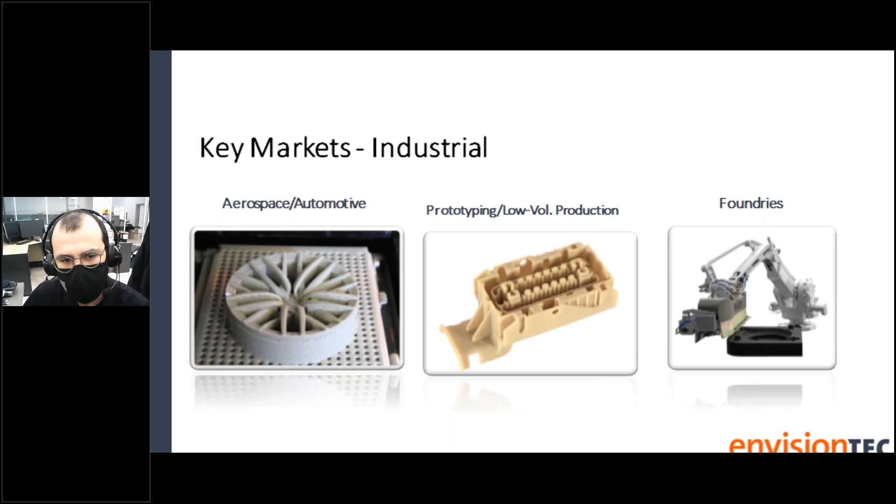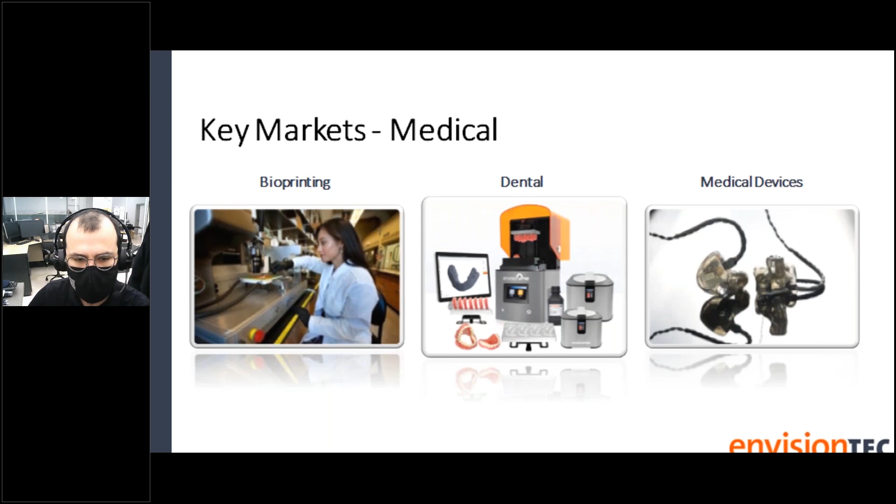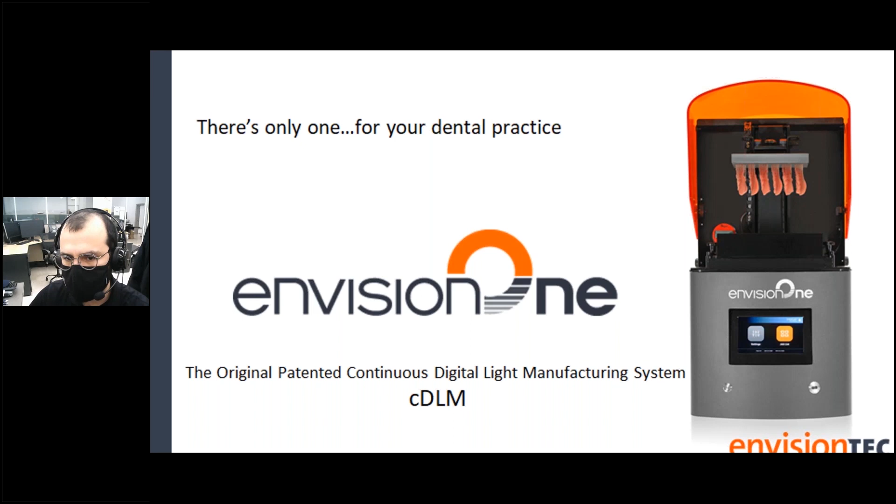Now you may ask, why is that so special? Well, when we introduce oxygen into our 3D printing, this allows us the fastest, highest level of accuracy and resolution, and zero separation forces. What that means is when the oxygen is introduced to our printing, we eliminate the typical

layering and visible striations that you may commonly see in a lot of dental parts. So this allows us to offer the highest accuracy desktop printer, but it also allows us to print large parts flat. We are well over 4 times faster than the standard DLP printer and over 10 times faster than the typical desktop SLA printer.

Now, speed in large parts is fine, but what's even better is to be able to maintain a highly accurate part that offers better mechanical performance. And what I mean by that is when our parts come off of the printer, we have maintained the same level of strength in the X, Y, and Z axis. This is known as isotropic properties. Very important, the EnvisionOne is the only desktop printer that can offer that.

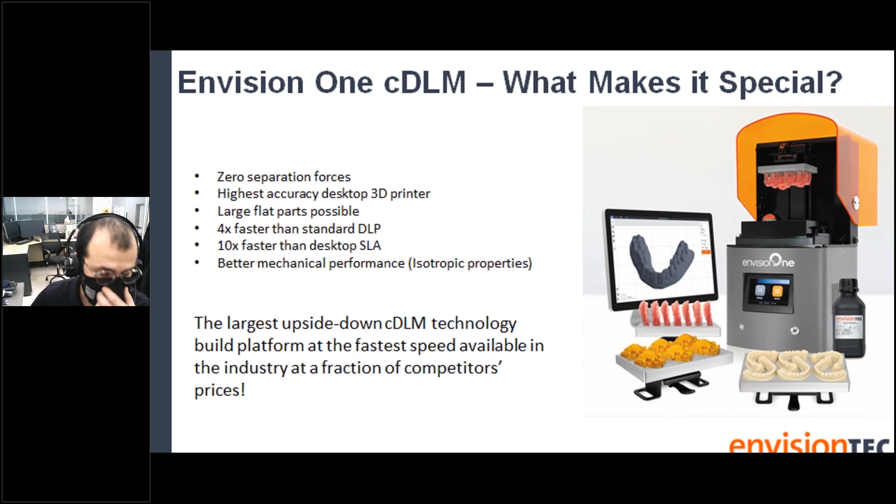And again, we offer the largest build platform at the fastest speed, so it'll really handle a lot of daily throughput.

So when we talk about fast, just to give you an idea, and this slide is a little bit dated but it'll give you an idea, the EnvisionOne prints at an average of 50 millimeters per hour. As I said, this slide's a little bit dated. We now have some new materials, some new software upgrades that are actually allowing us to print some model materials in excess of 100 millimeters per hour.

Again, this depends on the type of material and the layer thickness that you're printing, but you'll see versus the average DLP at 12 millimeters per hour or the average SLA printer at 5 millimeters per hour, this really is a much faster based process that will allow for a lot more daily throughput.

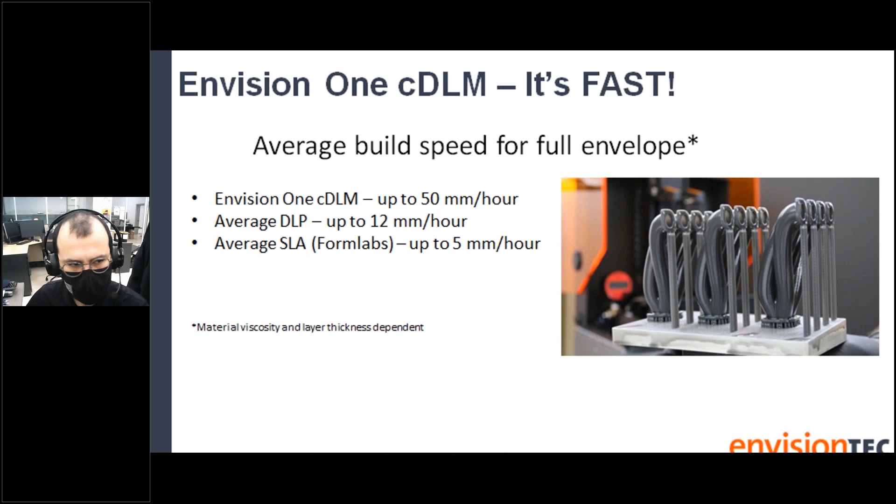So here, Miguel is running a full build plate, and you'll see that we're completing these parts in about 24, 25 minutes, I think, Miguel? Yep. The EnvisionOne, again, we've now surpassed 1 millimeter per minute.

We have layer thickness options that go from 5 microns up to 150 microns, depending on the material. Just to give you an idea, this means printing a full tray of dental models at 50 microns resolution in 30 to 45 minutes. If you were to move that to say 100 microns, you now have the ability to print dental models in the 15 minutes or less space, depending on the material.

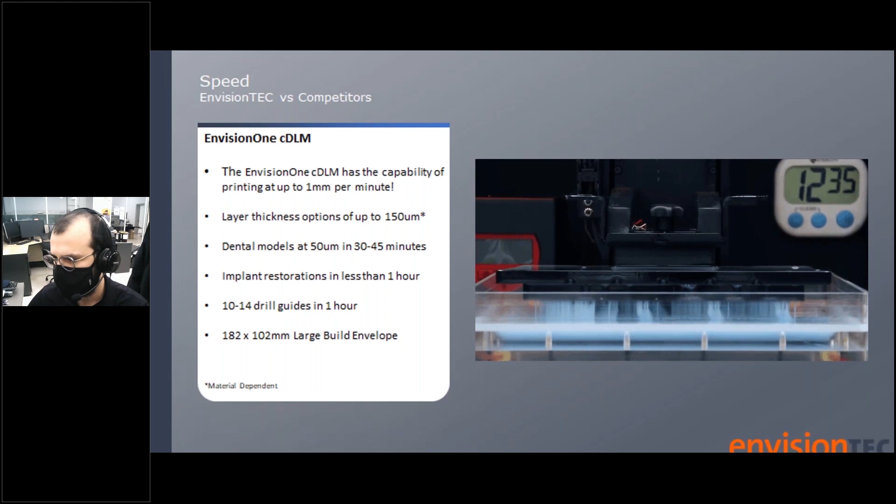A full tray of implant restorations in less than an hour. That also equates to give you a visual of 10 to 14 drill guides in 1 hour. And again, a large build platform, 182 by 102 millimeters, which is equivalent to like 7 by 4 inches.

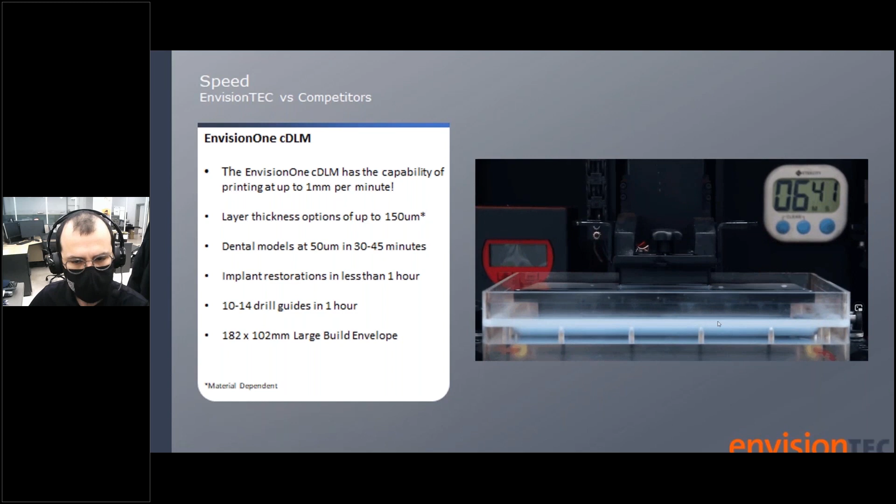So while hardware and equipment is good, materials is even more fun. We have the largest industry-leading portfolio of materials for 3D printing. In dental now, I think we've surpassed 24, 25 different resins.

Dentures for the base, denture teeth, a variety of models, including crown and bridge model material that allow for really beautiful quads with removable dies, indirect bonding trays, surgical guides, a large variety of models for thermal forming. And we actually have a new one coming out called the E-Aqua model.

And what is really unique about this for orthodontic models is, within the name Aqua model, we are able to water wash this model material after it comes off the printer as part of our post-processing, and eliminate having to wash the models in an alcohol bath. So instead of an alcohol bath, it's a fresh water bath. There'll be a lot more information coming on that.

We also have ortho models that no longer need a separator medium for your salt and pepper Hawley model techniques. Night guards, a variety of nice, clear, hard, or soft, gingival masks, partial denture frameworks including our new metal-free partial. EnvisionTEC is also one of the only companies that can produce castable wax-ups for crown and bridge work. A variety of bite splints, again both hard and soft, as well as custom impression trays.

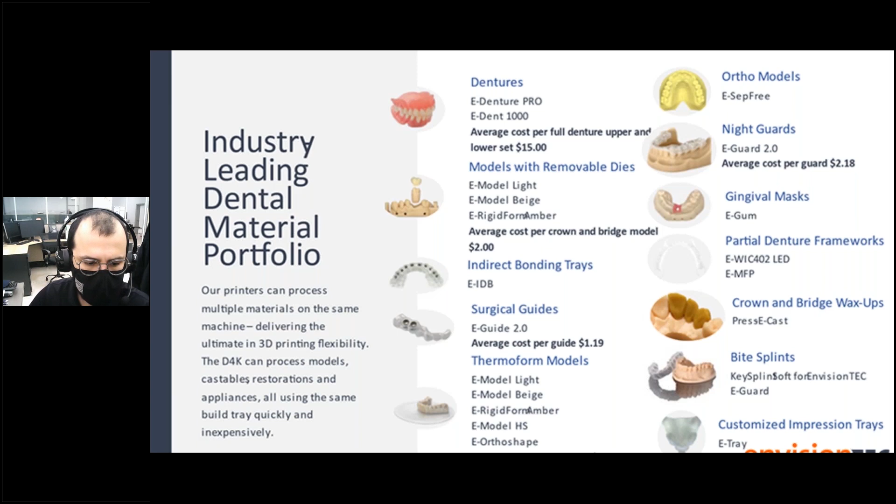Now, in addition to those materials that EnvisionTEC produces, we do actually work with other quality manufacturers as well, and this is to ensure high quality. So at EnvisionTEC, we have a new selectively open approach that allows us to partner with other material manufacturers that offer medical grade, end use, industrial materials that are going to meet our standards for usability and effectiveness with our printers. Now, just some of those are names like Keystone, Henkel Loctite, NextDent, DETAX, and Somos.

So we have a wide range of materials to go with our variety of printers as well.

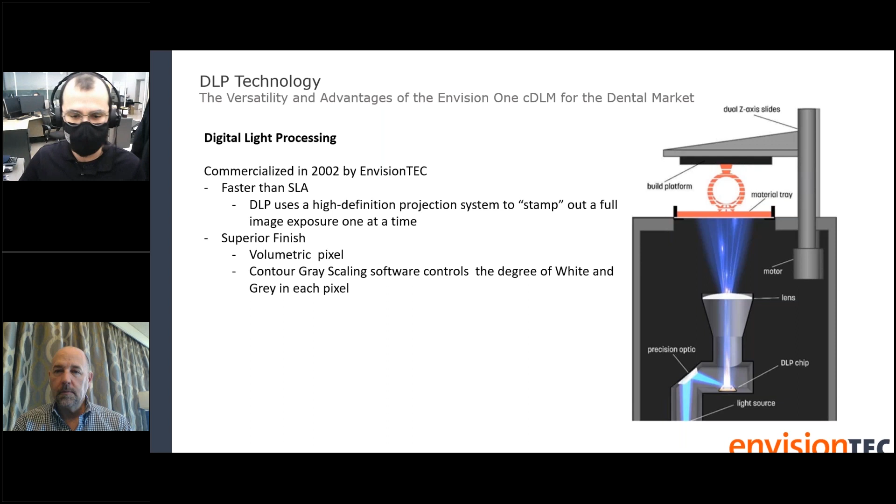Let's talk a little bit now about the 3D printers that we offer and what different technologies they use. After this, we're going to talk about CDLM, which is a twist to DLP.

Because we're talking about large platform printing, large build envelope, instead of taking that entire large build envelope and using a laser beam to trace the platform layer by layer, we have a laser head unit with a motor inside and lenses—a very complex piece of equipment.

The laser moves, and as it moves in the x-axis, it's plotting out points and drawing an entire line in the y direction. So it's moving in x, drawing in y, and we're able to scan the entire platform instead of tracing it with one small dot, which would take much longer. We're moving an entire laser head assembly, keeping it completely parallel to the material, which gives us better surface definition and lets us do it much faster.

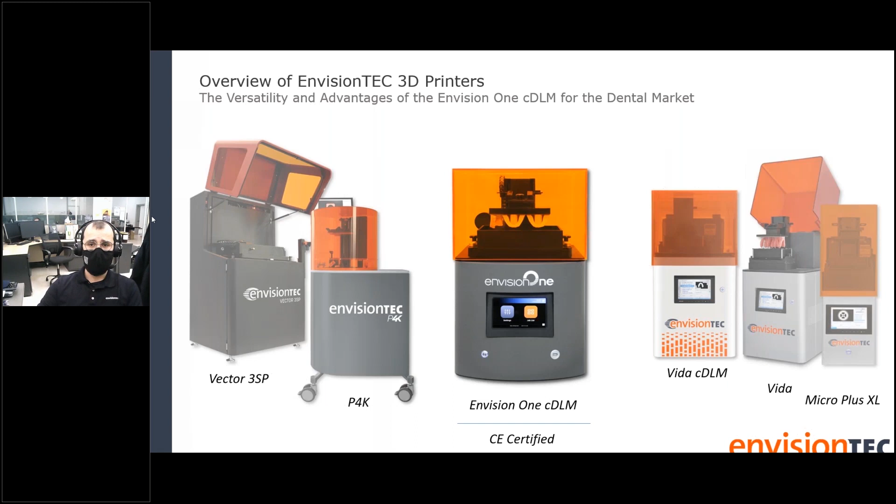Let's talk a little more about what CDLM is, because I want you to understand the technology behind this printer and what makes it so advanced. CDLM, or continuous digital light manufacturing, speeds up the DLP process by adding a thin layer of oxygen between the layer that's being cured and the material tray.

This layer of oxygen inhibits the resin from curing, which in turn adds many exciting properties. So the first advantage is speed.

We don't have to worry about separating from any type of film, and it also makes the pauses in between shorter. When you come down and you're ready for the next layer, you don't have to wait for material displacement because it happens so fast. This cuts off the time needed to build each layer, and overall the print time for an orthodontic model on the EnvisionOne is 30% less than other, let's say, pricey oxygen-based printers on the market.

So the second advantage of CDLM printing is accuracy. Parts printed on the EnvisionOne have isotropic properties and consistent part properties in all dimensions. This is especially important in the Z, because in prior 3D printing methods, while not all have the same quality, they share this issue.

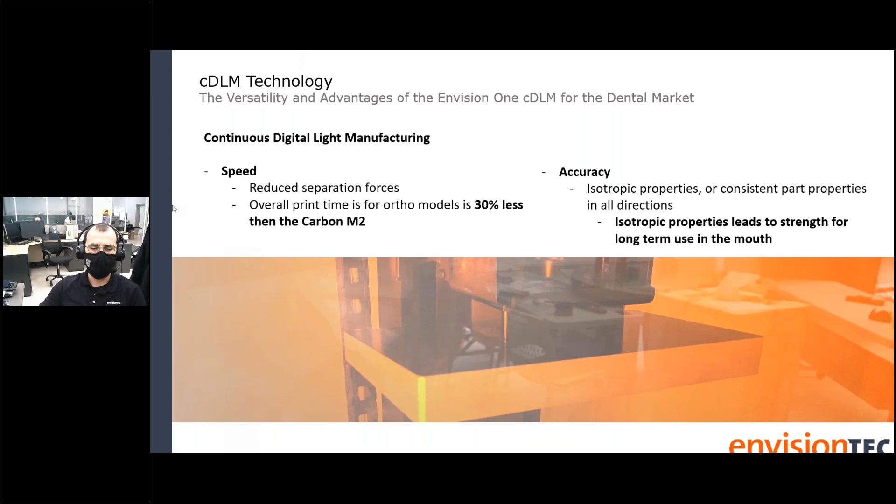Now, unfortunately, adding oxygen below a flexible film inevitably causes the film to tent or rise more in the center than in the outer edges. This means the film has a dome shape during the printing process, and the oxygen-rich liquid zone, the white zone, is also domed. This in turn means that parts are no longer 3D printed on a flat surface, even in the free space above this rich liquid zone.

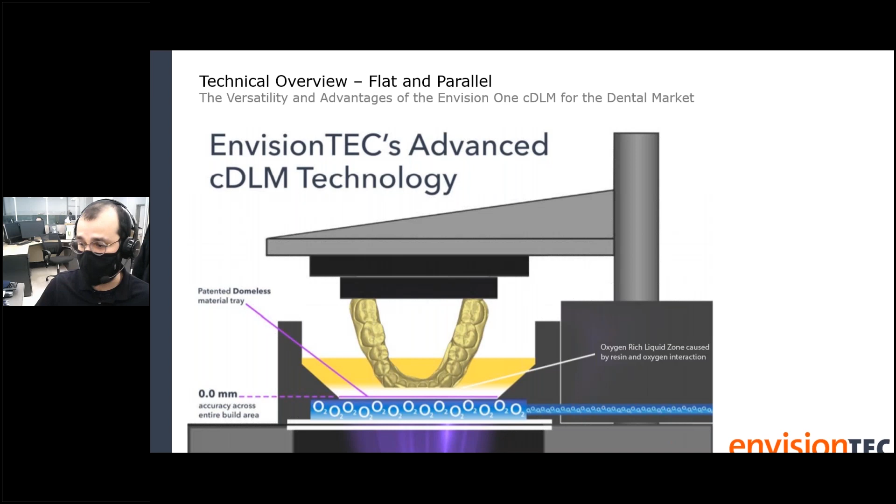The glass panel is the final part of the assembly, located on the bottom of the domeless material tray. Light is projected through the glass panel, through the oxygen chamber, through the film, past the zone, onto the resin in the chamber, and finally onto your part or platform. As you can see, it's a very complex piece of equipment, making it some of the most advanced CDLM technology on the market.

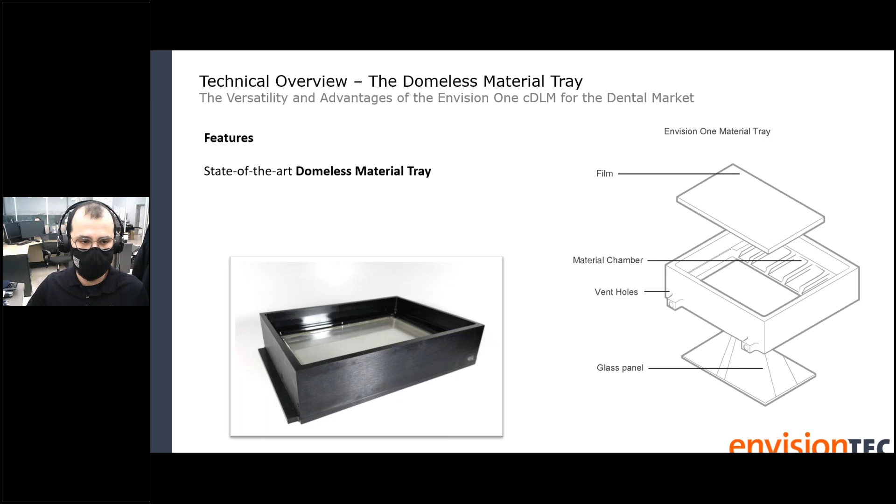So now let's talk about the projector and what makes it special in the EnvisionOne. With continuous printing, the light intensity must be powerful enough to penetrate the oxygen-rich liquid zone and relay enough light or energy to the resin above in order to build models accurately and as quickly as possible, as the platform advances at much faster speeds.

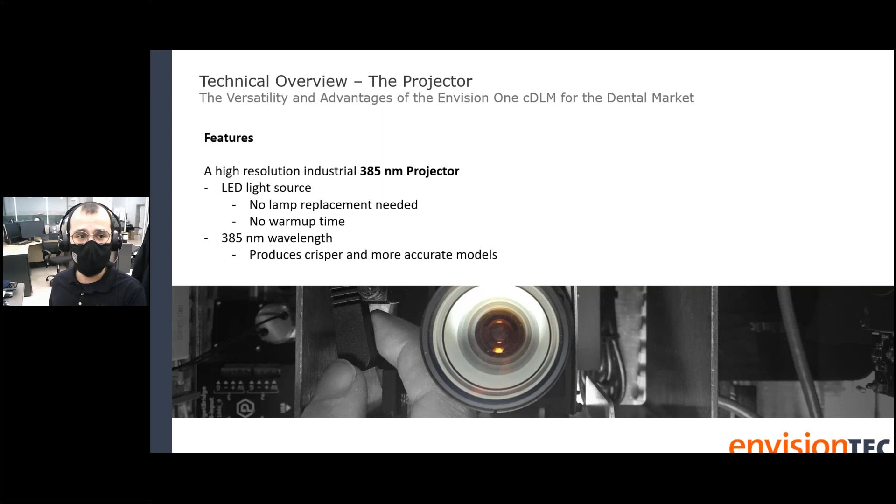This brings us to the 385 nanometer projector. Most 3D printers on the market currently use a 405 nanometer wavelength light source, which was designed for standard film projection. The industrial 385 nanometer wavelength projector used by the EnvisionOne was designed specifically and optimized for 3D printing. This projector is an LED light source that doesn't require any warm-up time and doesn't require lamps to ever be changed, meaning fewer consumables and more affordability for the lab or customer.

So what else is nice about 385 nanometers? Because it's a shorter wavelength than 405, it results in a more precise printed model and overall better accuracy. A shorter wavelength focuses the curing field, so with 385 nanometers, 96% of the part is cured in its green state, right out of the printer. With 405 nanometers, you're only curing about 80% of the way in the green state, which leads to light bleeding and curling issues, and a higher chance of curling during post-processing.

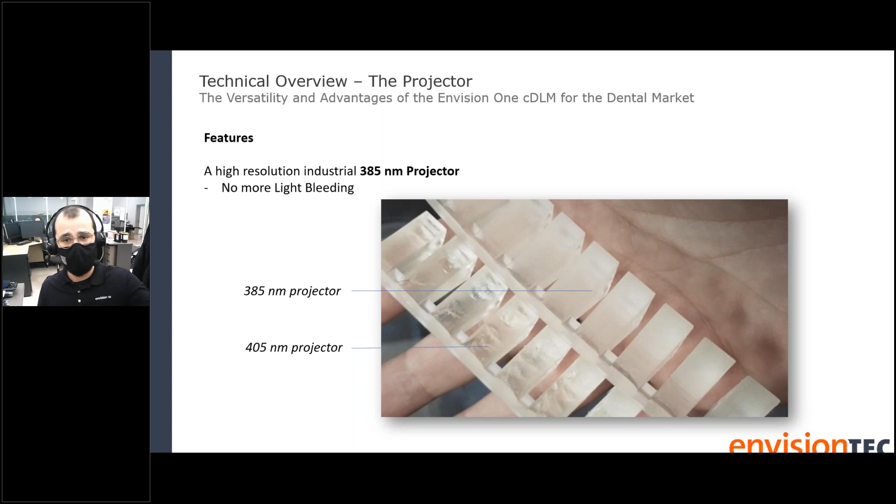So with translucent materials like E1 Guard and E-Guide, the 385 nanometer LED projector gives us a clear surface finish. With EnvisionTEC's patented contour grayscaling, the technology takes this one step further, allowing for an XY resolution boost from the native pixel resolution of 93 microns to 60 microns. I'll talk more about accuracy and resolution in a further slide, because we believe it's an important topic to discuss.

So let's talk a little bit more about what's offered by the EnvisionOne when it comes to its build. The EnvisionOne features dual linear slides on the Z-axis assembly. This gives the build platform superior stability and control throughout the print, and eliminates shift lines during the print for the printed model.

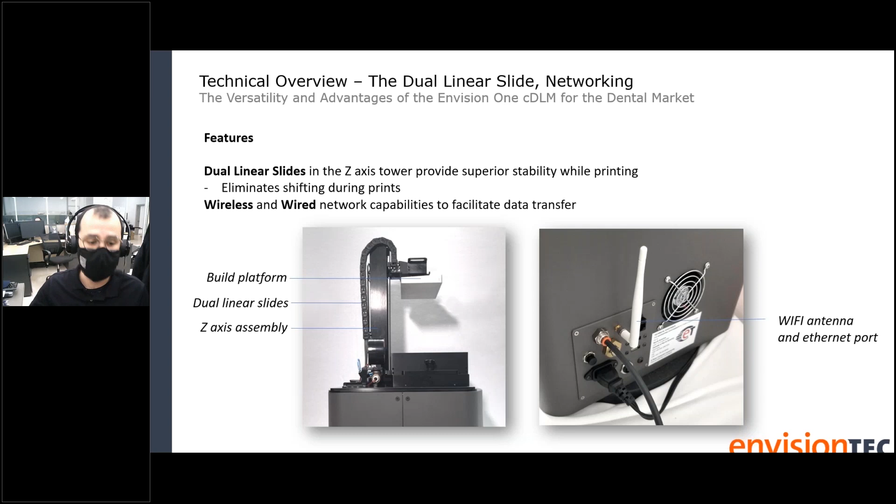For data transfer, we offer both wireless and wired capabilities. So if you don't have an Ethernet cable, you can hop on your wireless network in your lab or office and connect to the printer wirelessly. We also have USB ports on the printer, and there's plenty of them - 2 in the back and 1 in the front. So if you don't have a network that you can use, whether it's wired or wireless, you have an easy access port in the front of the printer to transfer your jobs from your PC to the printer itself.

Also, the EnvisionOne shows off a brand new user interface called the DLP CS, or DLP controller software. It is extremely user-friendly. It's a 7-inch touchscreen display that works beautifully, and it has a simplified controller software with iPhone-like icons. The controller software also prompts users whenever there is a new update, and operators can also choose not to use the touchscreen and instead connect a USB mouse and navigate the screen.

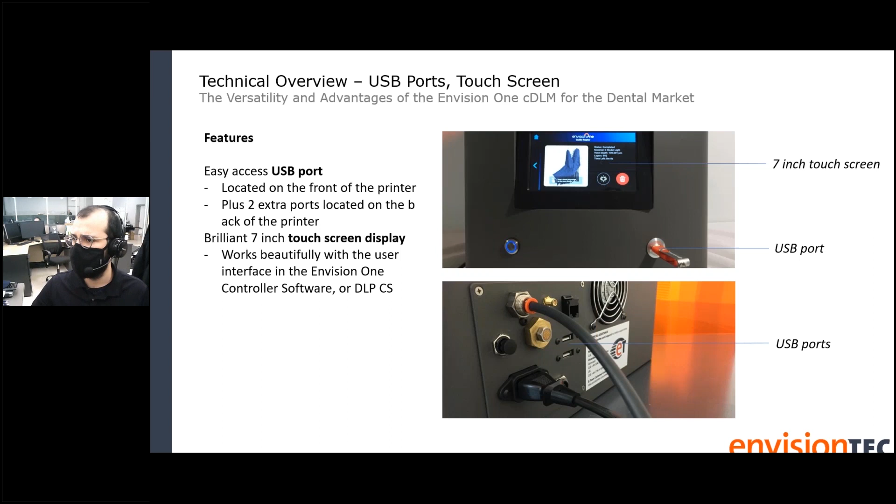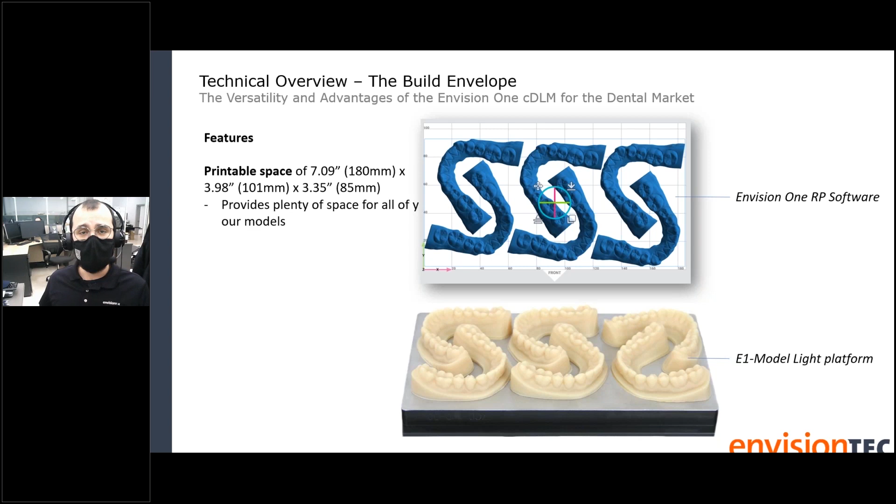Now let's talk a little bit about the build envelope. We do have a pretty large build envelope of about 180 by 101 by 85 millimeters, or roughly 7 inches by 4 inches. This is one of EnvisionTEC's largest desktop 3D printers to date, and has plenty of space for dental models during their print. This is only 10 millimeters shorter in the X direction than some of the other pricey subscription-based printers on the market.

So now, for me, the most exciting part of this presentation is the EnvisionOne RP software, especially for users that are currently using it - what is new and what is coming down the pipeline. But also for those of you that don't have the EnvisionOne software or don't have an EnvisionOne, what is it all about? Well, the EnvisionOne RP software was designed with intuition in mind. The software itself has been simplified completely to be able to get the job done as quickly and as efficiently as possible.

So all the necessary tools are readily available. There's no subfolders, there's no tabs for the actual 3D printing workflow. You can easily import a part, rotate, add supports, nest, and export the job file directly to the printer in a matter of minutes, or actually in a matter of seconds.

So we do have hyperprinting and different methods of hyperprinting. Hyperprinting is EnvisionTEC's way of making the entire nesting process one click for every single user. So with Hyperprint, you literally load in all of your models. Let's say you're printing horseshoes for aligner models, for suckdown. So you import, let's say, 10 models, but you can't fit 10 on the platform horizontally, so you want to print them vertically. You pull in all of your models, and the software automatically fixes everything and imports it for you.

Then you click one button, which is the Hyperprint, and select A-type jaws - the only reason we call it that is because if you look at the horseshoe when it's standing up, it looks like the letter A. You select A-type jaws and hit apply, and it will literally take every single one of your models, scan them, and position them in the best Z-axis or vertical orientation to ensure accuracy, not only throughout the entire model, but also in the most important part that a lot of other manufacturers don't keep in mind - I believe it's the incisal edge or the lingual, the part that will basically droop down when the model is in vertical orientation. When we place models in a vertical orientation, if we don't keep this in mind and go straight vertical without supports, you are going to have a drooping or sagging surface.

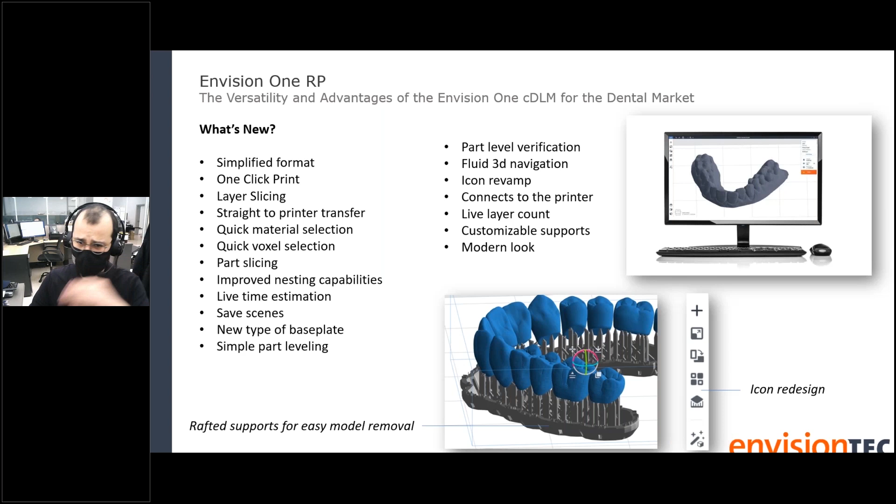Now, what else are we doing? We're working on a number of updates for our users to bring more features to your computer or to your nesting process. Not only do we have labeling, not only do we have auto placement, not only do we have auto nesting, but we're also creating a new generation of support widgets. There's a lot of features that EnvisionTEC is working on, and how do you keep up to date on everything that EnvisionTEC is working on and that EnvisionTEC is going to bring to market for you?

Well, I do want to announce that we have a new EnvisionTEC support center, www.help.envisiontec.de. This website is really jam-packed with plenty of resources for our customers and also those interested in learning more about our technology. We have information on our latest line of printers, from installation instructions to maintenance and even frequently asked questions. It's all on this site. We also keep everyone up to date with our blog posts on this site with new upcoming features, so please keep an eye out for it. And if you can, bookmark it, because this is a great website that's going to be continuously built up and kept up to date. If you're interested in knowing what EnvisionTEC is all about, what the printers are all about, how to set them up, how to get them running, how to work with them, how to use the software, or if you want to see videos on any of our technology and how it's used, this website has all of that information. It also has PDFs, site prep guides, all of it. So I encourage you to go over to our website and check it out.

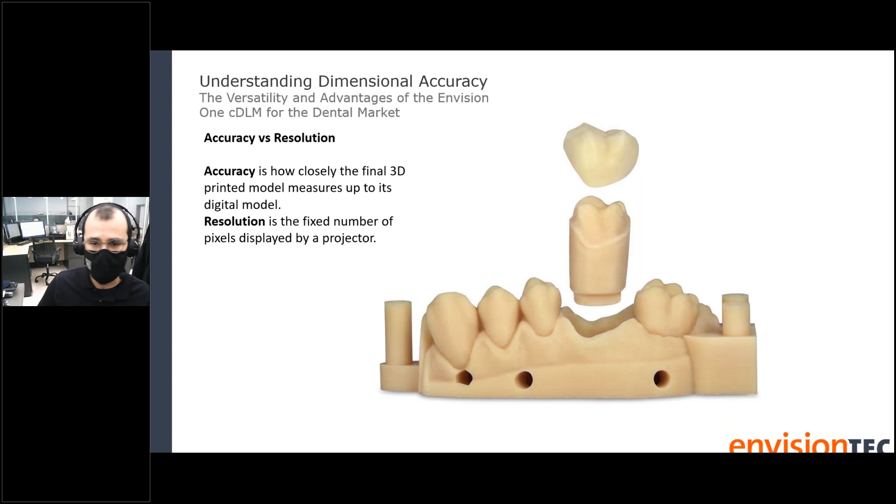So speaking of accuracy, let's talk about orthodontics. The American Board of Orthodontics was the first dental organization to publish standards for dental accuracy requirements for digital models and 3D printing in 2016. EnvisionTEC's internal accuracy standard is actually a bit higher than the ABO standard requirement of 99.9% accuracy within 200 microns.

So we did perform a test to see how EnvisionTEC printers compared with some of our competitors in terms of accuracy, with the exact same STL file printed in a variety of printers. We're just going to show you guys a few of those scans.

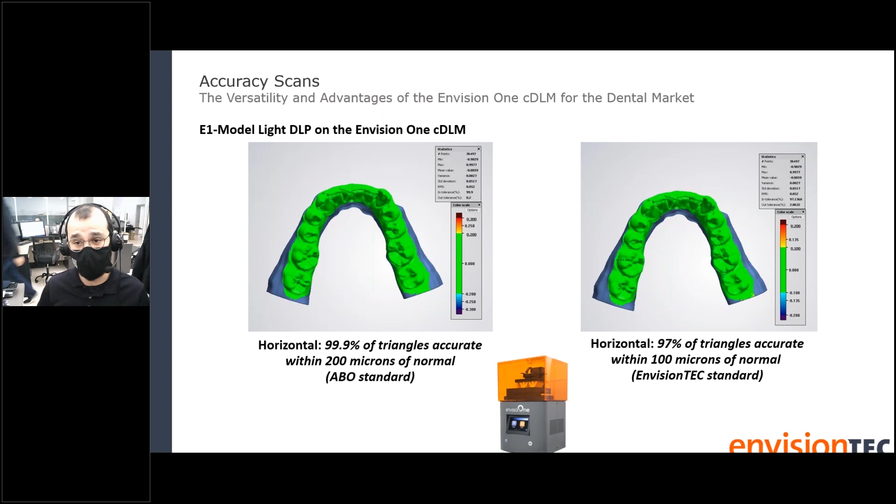Now let's look at the ABO standard, which is 99.9%. Again, it's not as tight of a tolerance, but it is their recommendation or requirement for printing orthodontic models. The SLA desktop printer is at 95% accuracy, which doesn't meet that requirement, while the EnvisionOne does it no problem.

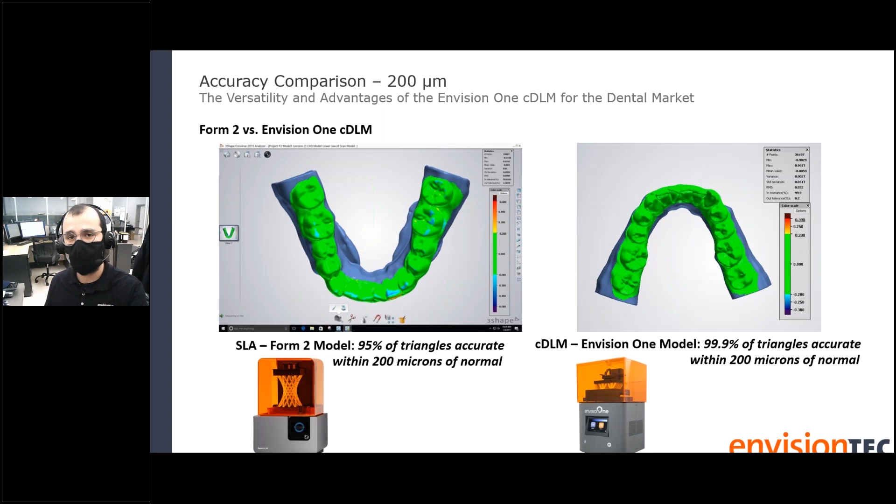Orthodontic applications tend to have a looser accuracy requirement. However, dental is much more stringent, the tolerance is much lower. So let's look at 50 micron accuracy.